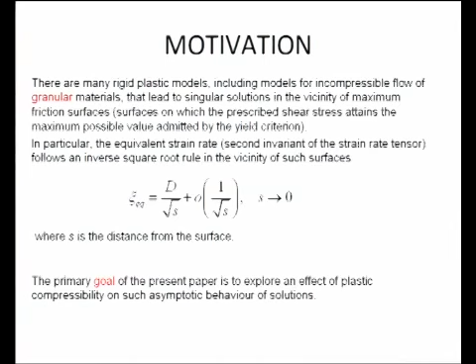Surface on which the prescribed shear stress attains the maximum possible value admitted by the yield criterion. In particular, the equivalent strain rate, second invariant of the strain rate tensor, follows an inverse square root rule in the vicinity of such surfaces. There S is distance from the surface. The primary goal of the present paper is to explore an effect of plastic compressibility on such asymptotic behavior of solutions.

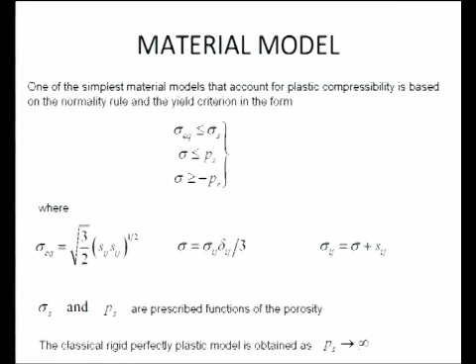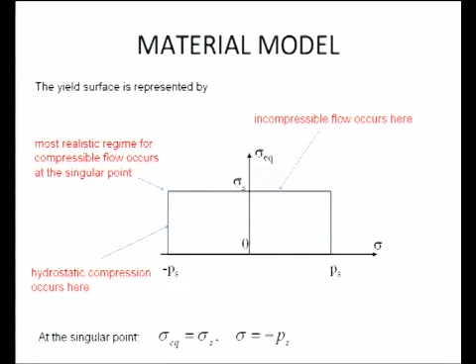One of the simplest material models that account for plastic compressibility is based on the normality rule and the yield criterion in the form. This is equivalent stress and this is hydrostatic stress. These parameters are prescribed functions of porosity. The classical rigid perfectly plastic model is obtained as this condition. The yield surface is represented by these diagrams.

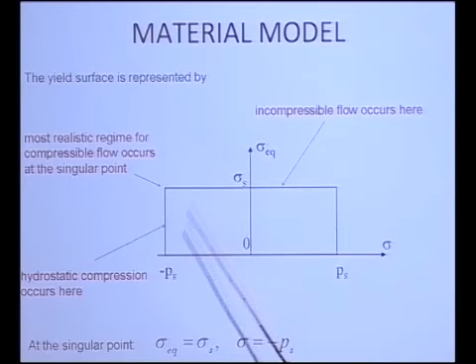If the state of stress corresponds to this side, then flow is incompressible. This solution has been already investigated, and therefore it is not of our interest. If the state of stress corresponds to this side, then hydrostatic compression occurs. Therefore, it is not of our interest. This is a very special case. The most realistic regime for compressible flow occurs at the singular point. At this point, the state of stress is given by these equations.

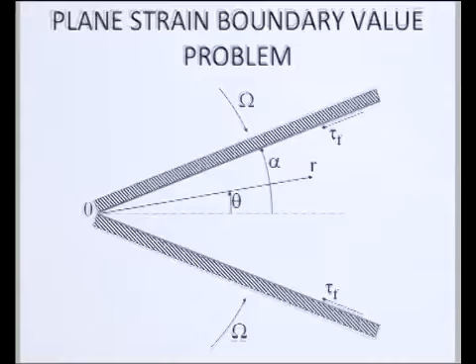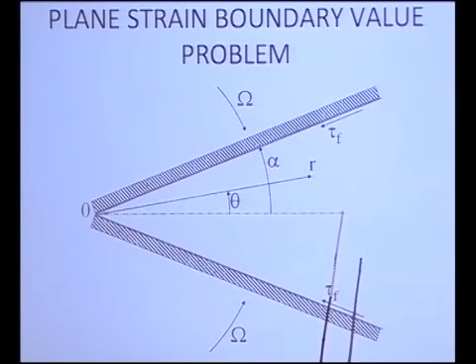The problem considered here consists of plane strain compression of plastic materials between two rotating plates. The solution at the initial instant is obtained. Here omega is angular velocity, and this parameter is friction stress.

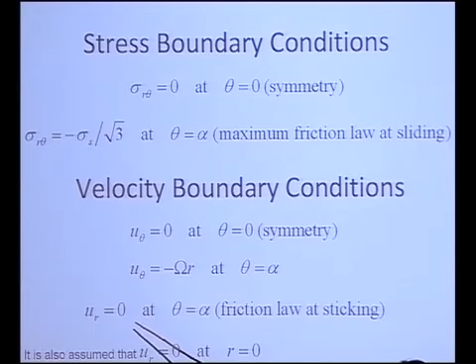The stress boundary conditions consist of the conditions at the axis of symmetry and friction law. The velocity boundary condition consists of condition at the axis of symmetry, condition at the plate surface, and friction law. This is the other part of friction law. This is condition satisfied at sticking, and this condition satisfied at sliding.

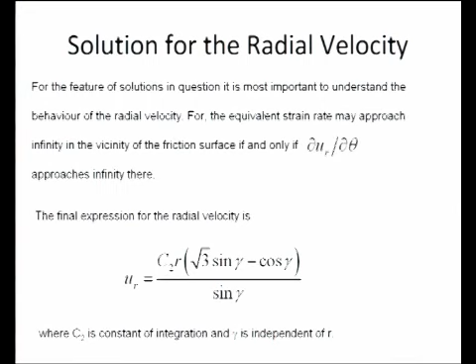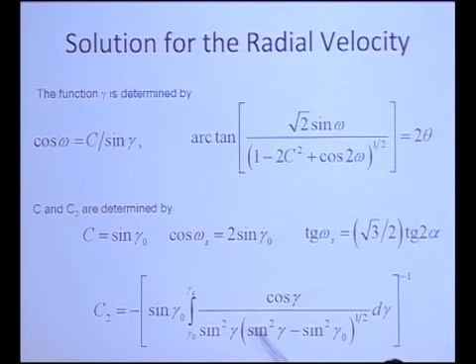For the solutions in question, it is most important to understand the behavior of the radial velocity. The equivalent strain rate may approach infinity in the vicinity of the friction surface if and only if it approaches infinity there. Asymptotic solutions for the boundary value problem are obtained. The final expression for the radial velocity in terms of gamma you can see here; C2 is a constant of integration and gamma is independent of r. The function gamma is determined by these equations, and constants are determined here.

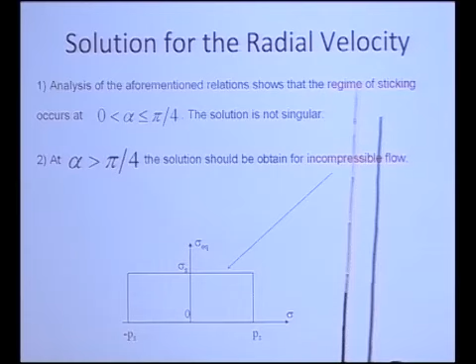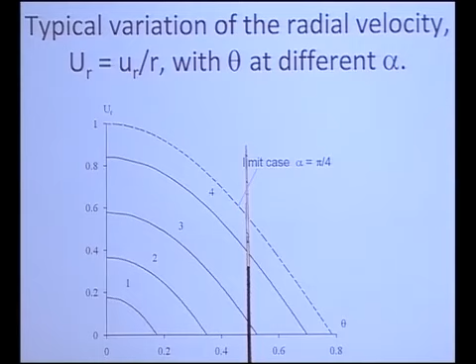Analysis of the aforementioned relations shows that the regime of sticking occurs in this case. The solution is not singular. In this case, the solution should be obtained for incompressible flow. A typical variation of the radial velocity is shown there. These points correspond to the friction surface. It is seen in this diagram that sticking occurs in the cases considered.

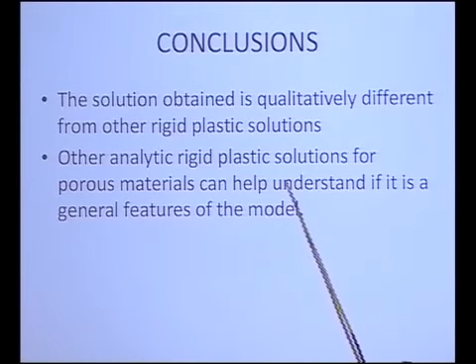In conclusion, the solution obtained is qualitatively different from other rigid plastic solutions. Other analytic rigid plastic solutions for porous materials can help understand if it is a general feature of the model.